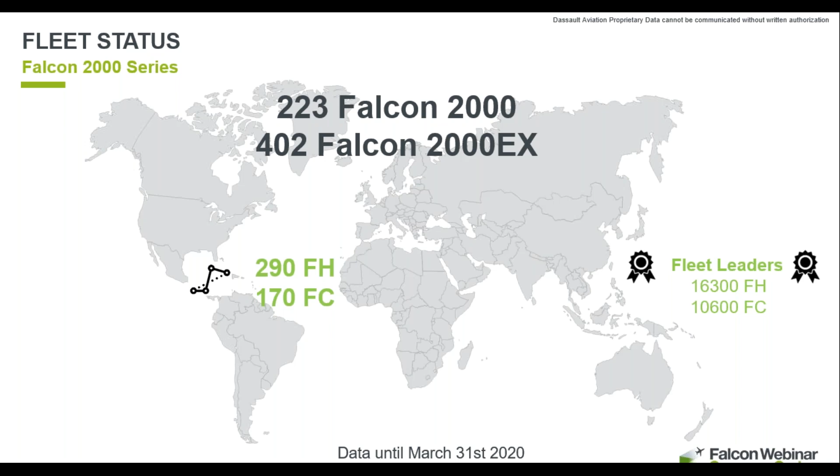So at the end of March, there were 620 Falcon 2000 aircraft in operation in the world, with an average activity for a year around 290 flight hours and 170 flight cycles. 2 aircraft are the fleet leaders. 1 aircraft has already reached around 16,000 flight hours, and another aircraft has already reached around 10,000 flight cycles.

Concerning the dispatch rate, it's the same dispatch rate for the Falcon 2000 series aircraft and for the Falcon 2000 EX series. It is 99.8%.

I just want to remind you that it is very important for us to get your feedback and the reported events concerning your aircraft, because all our analysis for the dispatch rate is based on the data you give to us. So we want to have the most accurate calculation possible in order to present the figures. So do remember, give your feedback.

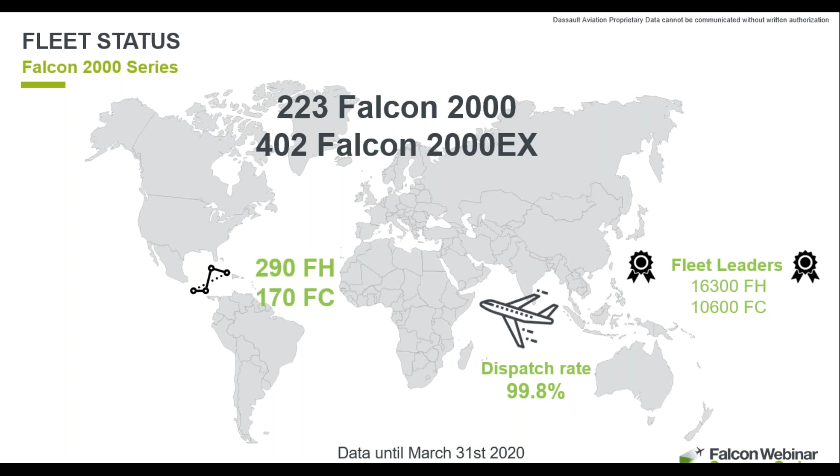During the last seminar, last year, we presented several topics. Now, what is the status on these topics? What are the achievements? As you can see in this table, some of them are released. We have published either a service bulletin or an FSA, and the solution is available for you. But 3 of them are still in progress, in fact, mainly due to logistics issues. You will find for these 3 subjects the updated target date for the publication of the solution.

But today you will have a specific presentation on the aileron bearings in a few minutes, on the new maintenance task for the maximum cabin altitude limitation function, and on all the LED solutions which are available for your aircraft.

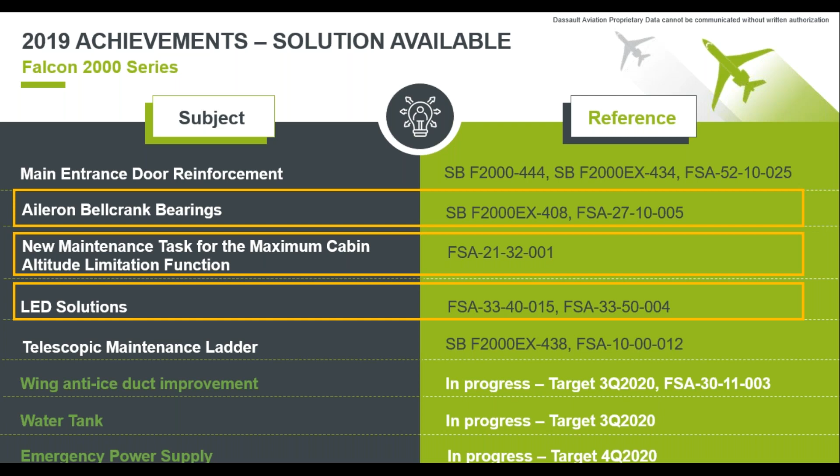So now let's move to the main dispatch drivers. And welcome, Luca.

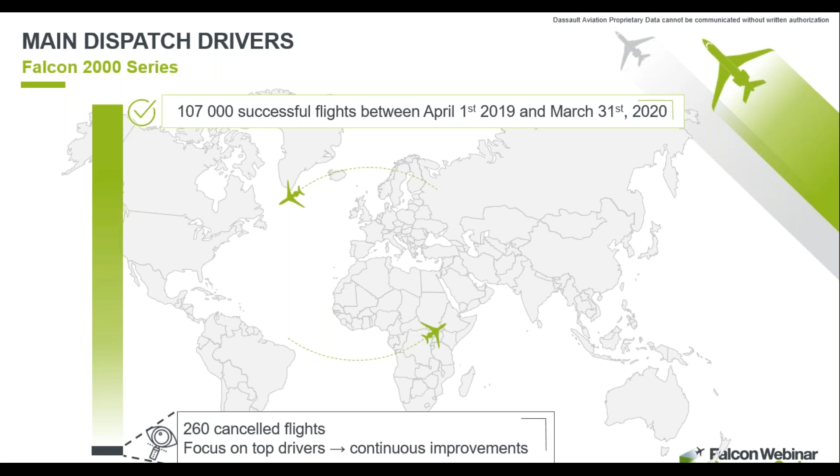So the drivers we will present you are for the Falcon 2000 EX aircraft. Those are the top 5 drivers ranked by the number of cancelled missions. The first one is the NIM module. Then is the engine vibration monitoring unit, nacelle anti-ice valve, accessory gearbox magnetic seals, and advanced graphic module.

The subjects highlighted in green are the ones for which we have a solution, but we will have a dedicated slide for each of them.

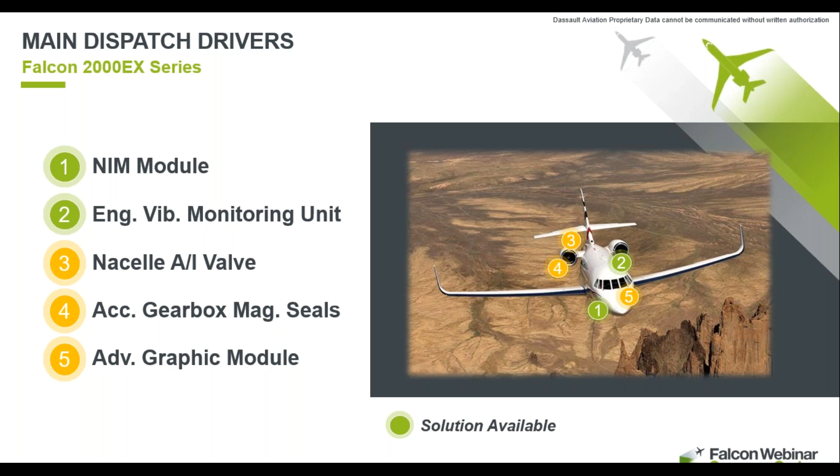The first topic is the NIM module. NIM module is an EASy component located in the MRC. We do have some cancelled missions due to radio cabinet failure.

In recent years, we performed a lot of work with the manufacturer to work on the solder profile and to introduce an improved solder profile on the NIM module. This solution is implemented on every new NIM since November 2013 and every repaired NIM since mid-2015. So the solution is available in spares. We do have a solution.

But we keep monitoring the fleet. Last year, 85% of the cancellations involved not-retrofitted parts. So for us, it's a good metric for the solution.

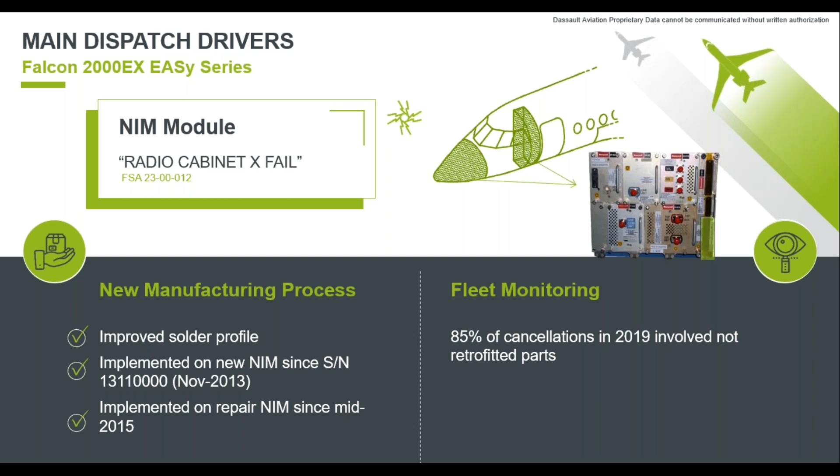If you have this kind of issue, we do have a new part number, which includes improved internal electrical components. It's fully interchangeable with the previous part number, and it's available in spares. Like we did for the NIM, we keep monitoring the fleet despite having a solution, and last year, again, 85% of the cancellations involved the old part number.

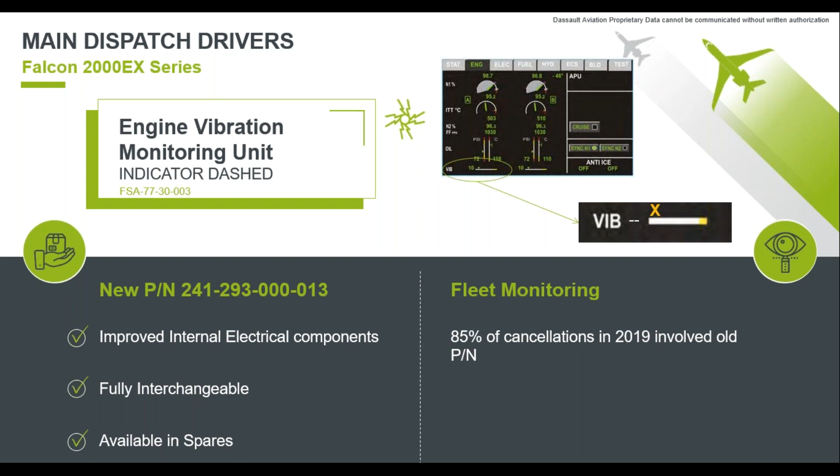Now, at the third position, Matthew will take the mic. Thank you, Lucas. So now I'm going to present you the nacelle anti-ice valve topic as the main dispatch driver.

Basically, there are two flight deck effects. One is the engine anti-ice overpressure, and the other one is the engine anti-ice unwanted operation.

This year we had initial investigations performed by the new manufacturer of the valve, and now we need to conduct additional investigation to make sure the proper actions will be taken regarding this topic. Also, we are working on increasing the quality process for the production and repair of the units.

Regarding fault isolation and extended dispatch, I'd like to recommend you refer to fault isolation manual procedures in case you've got an overpressure or an unwanted operation, because it is very detailed and will help you isolate the faults. We've seen some cases where, for example, the overpressure switch is involved in case of an overpressure. So it's very helpful for you to use these FIM procedures to make sure the correct component is properly troubleshot.

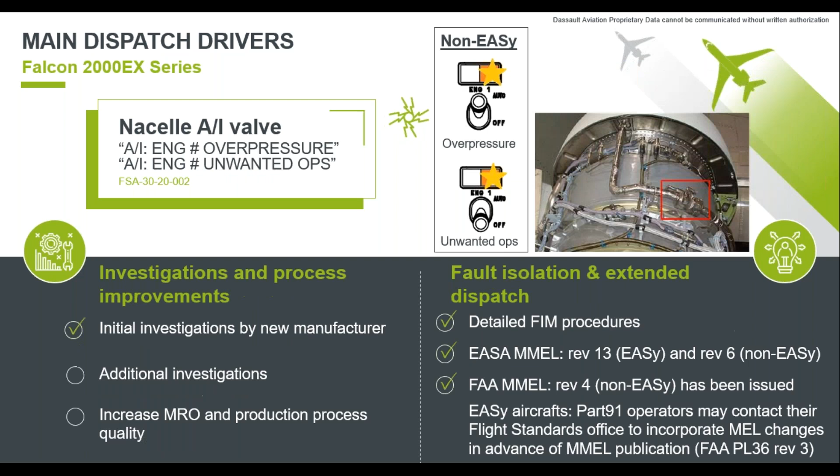The next topic is the accessory gearbox magnetic seals, which is also a main dispatch driver. These seals are located on 3 pads. We've got one on the starter pad, another one on the electrical generator pad, and the last one on the forward hydraulic pump.

What we observe in the field is a premature wear of the carbon element. This carbon element is located between 2 metallic parts, and once this carbon element is worn, you've got metal-to-metal contact, and thus it will generate chips. That's why the main flight deck effect we will see is an oil chip indication.

Pratt & Whitney Canada conducted an investigation in 2019, but unfortunately the root cause for this premature degradation was not identified. Pratt & Whitney is now working on gearbox improvements to improve the reliability of the seal.

We've got some tips and recommendations for you in case such an event occurs. First, send chips to a lab for analysis as soon as possible. There is an alloy typical for an AGB magnetic seal degradation, which is a clue for further troubleshooting. We'd also recommend you contact Pratt & Whitney Canada in case you've got repeated events, to make sure this is addressed.

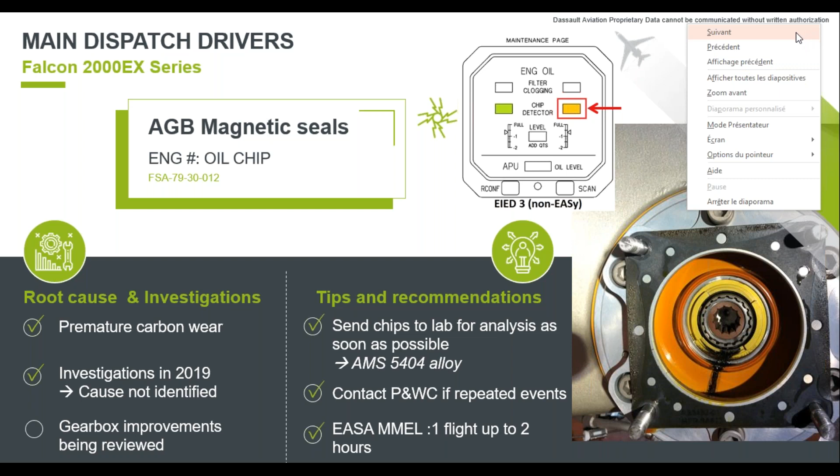So now moving on to the next topic, the advanced graphic module, with Lucas. Thank you, Matthew. Yeah, the last driver, number 5, is an EASy component, the advanced graphic module. Those modules are here to feed your display unit. We do have some AGM failures, and when you face this kind of issue, you will have a red cross on the display unit.

To address this issue, we know that the failure is coming from an internal graphical processor that is facing some ionic contamination. So we keep performing investigation and testing with the part manufacturer in order to provide you the best solution.

Just a special word for the last available version of the advanced graphic module, which is the MOD E. This MOD addresses the data loading issue, the FTP-COM failure that you can have with the EASy II third certification. If you comply with the EASy II 4th certification, you will address this failure. We'll come back on that later on, and we have a dedicated FSA on this specific topic if you want to consult it.

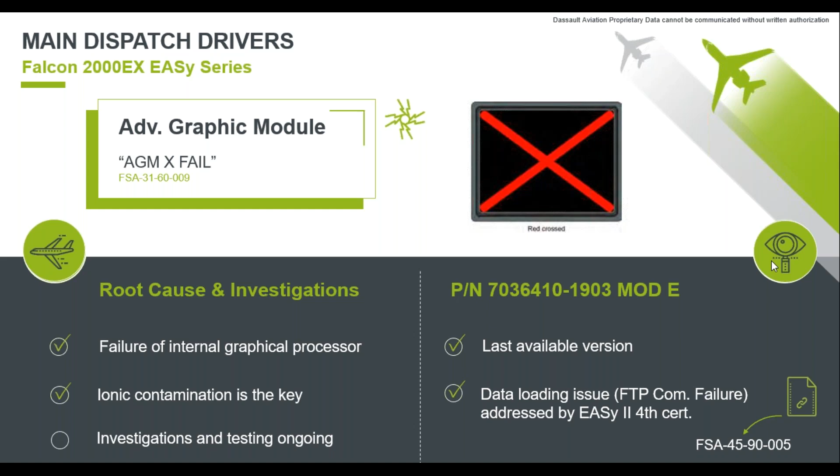Now we'll move to the next section, which is the reliability improvement. And to present this section, François will join me. François, would you like to introduce yourself? Yes, good morning everybody. My name is François Satre, and just like Lucas and Matthew, I'm part of the Falcon 2000 program support team. I have been working for Dassault for 5 years now.

Thank you, François. So, the first improvement we want to introduce today is the bell crank bearings involved in the aileron control. Those bell crank bearings are located at frame 15. They are used to transfer the roll control from the fuselage to the wing.

They are located in a humid area, and we notice some corrosion issue on the bearings. The corrosion issue can lead to stiffness in the aileron control, which is something we want to avoid. That's why we worked on a new design, consisting of a new material more robust to corrosion. The solution is available through a service bulletin, which consists in replacing the 4 bearings.

If you comply with the service bulletin, it will also have a direct impact on maintenance cost, because you will extend the bearing replacement from the 1C inspection up to the 2C inspection. During the 1C inspection, you will just have to perform a visual inspection. If you want more technical details, there is a dedicated FSA. I forgot to mention that this topic is specific to the Falcon 2000EX series.

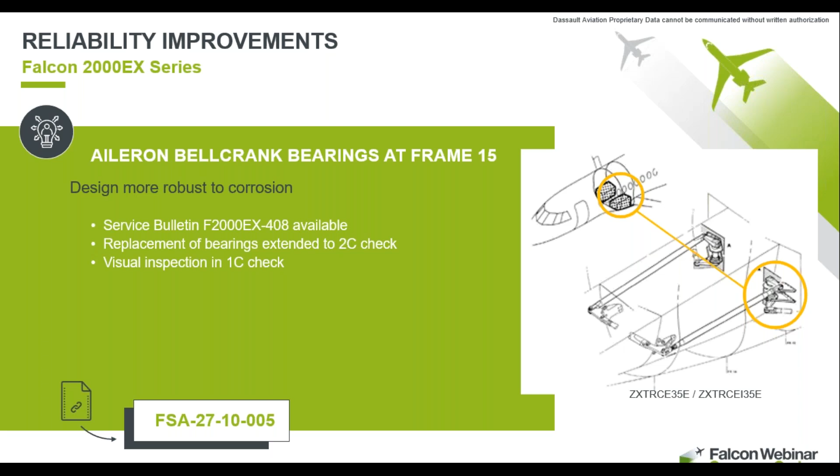The next improvement, specific to the Falcon 2000EX EASy series, is directly linked to what you can see on the right of your screen. In more and more airports, the APU runtime is limited due to the environmental footprint. With our aircraft, when you initialize the aircraft with the GPU to reduce the APU runtime, you can have some issue while switching to the APU.

You can lose the flight plan data. You can also lose galley and cabin system, which can be annoying for the crew and passengers. That's why we worked on a solution to avoid issues while switching from GPU to APU. This solution is available through a service bulletin. You have to know that if you want to comply with the service bulletin, there is a prerequisite: two service bulletins, one consisting in batteries charging by GPU, and the second, the suppression of voltage drop during APU start. So you must comply with those before complying with the final solution.

Again, if you want full technical details, I encourage you to consult the FSA. So for the next topic, I will leave the mic to François.

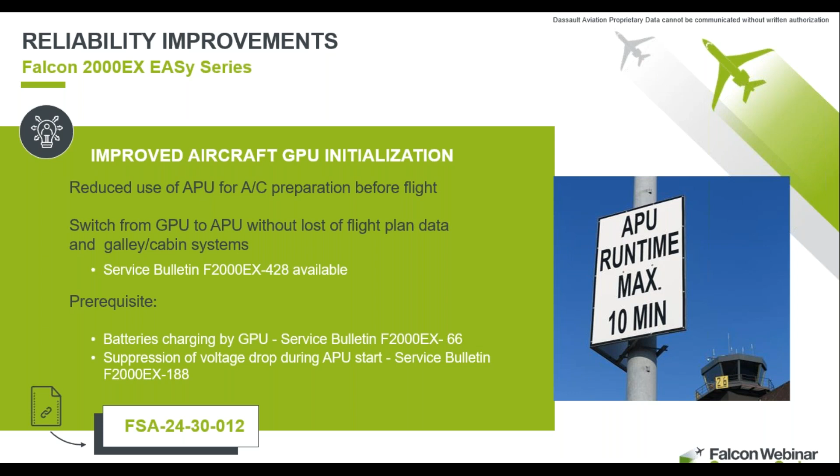The next topic concerns all the Falcon 2000EX series aircraft which are equipped with aft chemical toilets. These toilets are fitted with a rigid filler line, which is the part you can see highlighted in yellow on the upper right picture. This line can be used for two purposes.

The first one is to fill the waste tank with clean water prior to a flight. The second reason is to use it during the rinsing process of the waste tank to rinse the tank with clean water as well.

We have had several cases of corrosion and cracks on this line reported by 2000 operators. That's the reason why we are currently working on an improvement which consists of a flexible pipe more robust to corrosion. These improvements will be made available by the end of the year through a service bulletin.

In the meantime, we have two recommendations to prevent occurrence of corrosion on this part. The first one is to make sure that the line is fully drained prior to closing the flushing coupling. Otherwise, you may have some water retained in the line, and this could lead to corrosion.

The second recommendation is to never put disinfectant solution in the waste tank through this filler line, because this disinfectant solution is a corrosive product. It should always be introduced in the waste tank through the toilet bowl in the cabin.

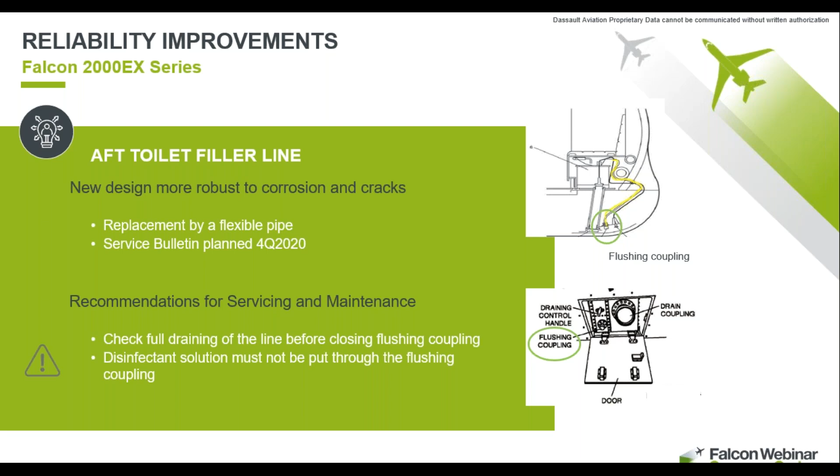The next reliability improvement I would like to introduce are the LED solutions, which is a topic we've been working on for the past few years. There is an FSA on the portal which describes all the available solutions at the moment, starting with the exterior lights.

So from nose to tail, we have the taxi lights, the landing lights, the belly anti-collision lights, the emergency door projector on the right wing. We have on the fin tip and/or on the winglets the anti-collision and navigation wing lights, the upper fuselage anti-collision, and at the back we have the anti-collision and navigation lights.

The upgrade path for all those parts is detailed in the FSA, and it's made either through compliance with a service bulletin or through installation of interchangeable parts.

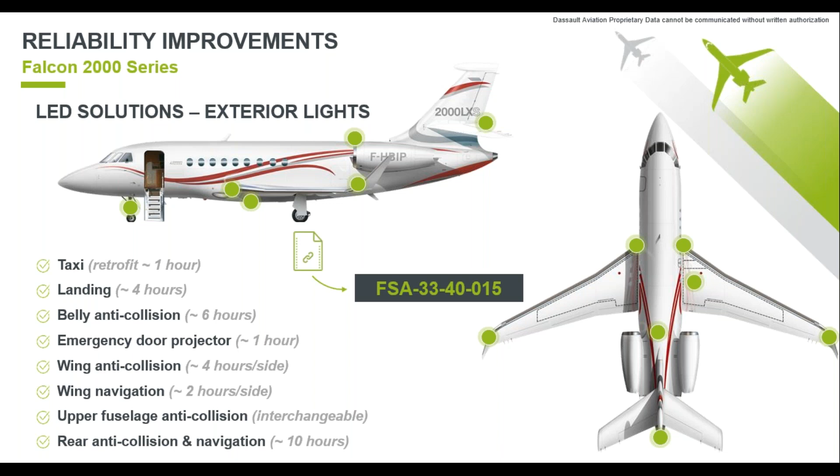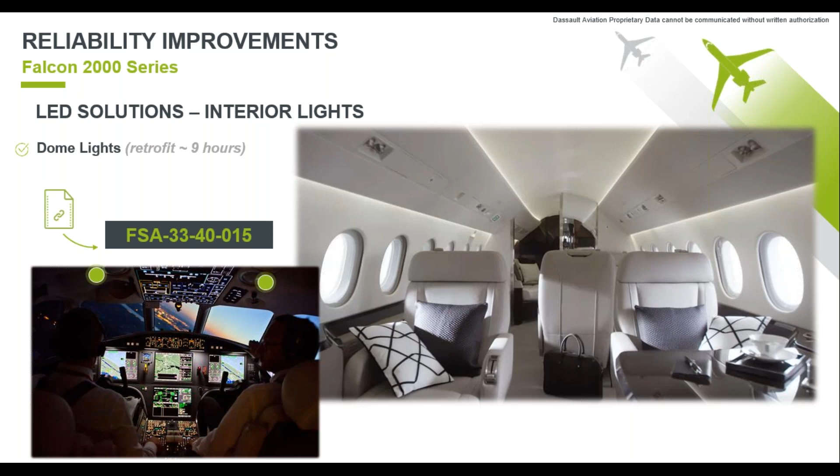This FSA also details the available solutions for interior lights. Now, at the moment, we have a first service bulletin that enables installing LED dome lights in the cockpit, and we also have a service bulletin for cabin emergency signs in the cabin.

As you can see on the bottom right picture, these LED signs come with a new design of green pictograms instead of the old-fashioned red writing on the white background. So this is a small change that comes with this LED improvement.

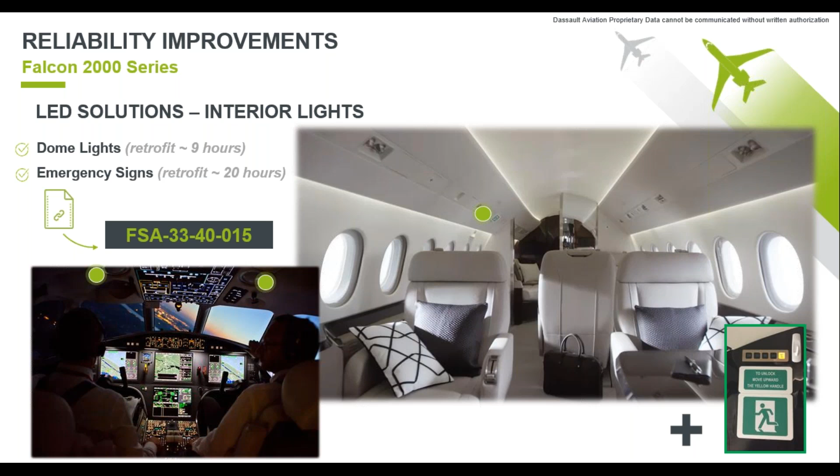Moving on to the maintenance improvements now, the first topic I want to introduce concerns the pitot probes. Some of you may know that these probes already have inspection and cleaning tasks that provide damage criteria, in particular for the blade damage and for the tube-shaped deformation.

We want to improve those damage criteria and add a new criterion for the longitudinal bending of the probe. So by the end of the year, we will publish an updated task that will permit a total longitudinal bending of up to 1 millimeter, which should help further prevent scrapping of these parts.

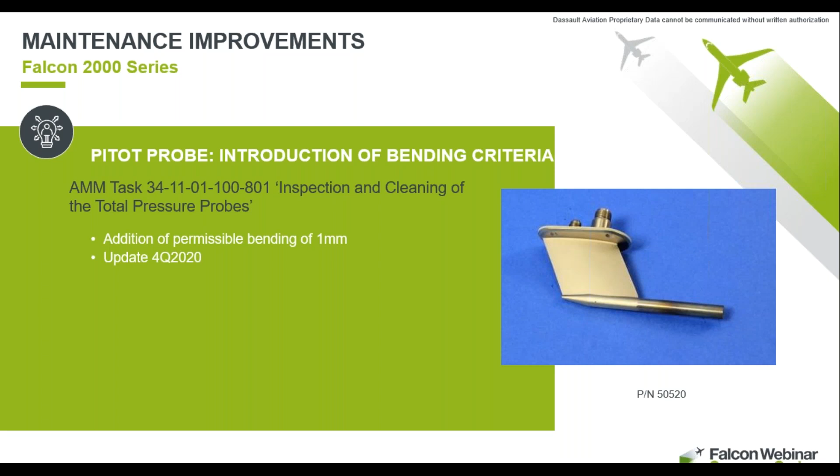We are also working on the ground servicing manual procedures, and in particular we have issued lately for the 2000 series a new procedure for foreign object suspected collision inspection. This procedure aims at providing more autonomy to the flight crew in case of a suspected collision, typically a bird strike.

Instead of having to go through the whole comprehensive maintenance inspection, the flight crew will be able to use this light procedure to perform a visual inspection without any specific equipment. If there is nothing abnormal reported, the aircraft can immediately return to service. Otherwise, the usual comprehensive maintenance task for inspection will apply.

This task is already available for the 2000 series, and for the 900 and 7X, the ground servicing manual will be updated by the end of the year.

Thank you very much, François. Now let's move to the last topic concerning maintenance improvements.

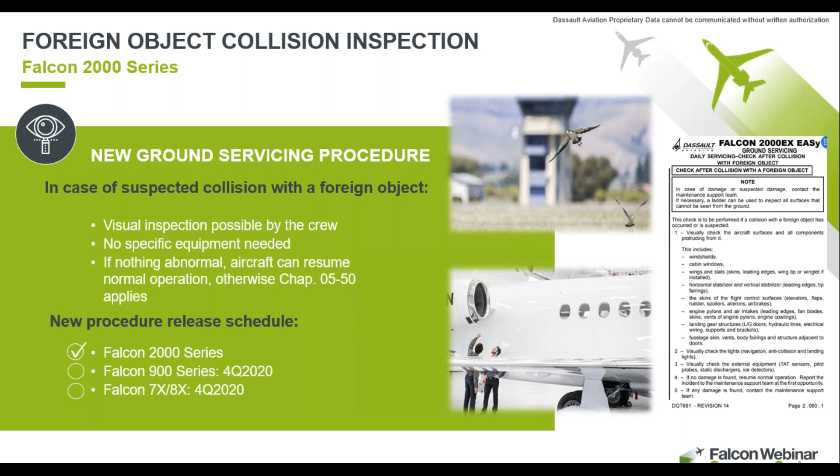So, François, can you explain why you introduced a new task and a new tool in C-check for the outflow valves? Yes, indeed. We've introduced this new task scheduled in C-check for all the Falcon 50s, 900 and 2000.

It's a task that aims at performing a test of the cabin altitude limitation function. In the past, this test was performed only during the check flight performed at the end of the C inspection. But unfortunately, it did not enable anticipating failures, and sometimes it would end up causing additional downtime to repair the outflow valves at the end of the C check.

So now, with this test performed on the ground during the inspection, you can actually anticipate failures and send the outflow valves for repair during the C check.

This test enables you to check both valves independently, so you can identify the faulty valve if any of them is faulty. In the end, you will send only one valve to the repair shop.

To perform these tests, we have developed a dedicated tool, shown in the upper picture. This tool is composed of a vacuum pump and a set of fittings, pipes, manometers, and flow meters. All the details are provided in the FSA 2132001.

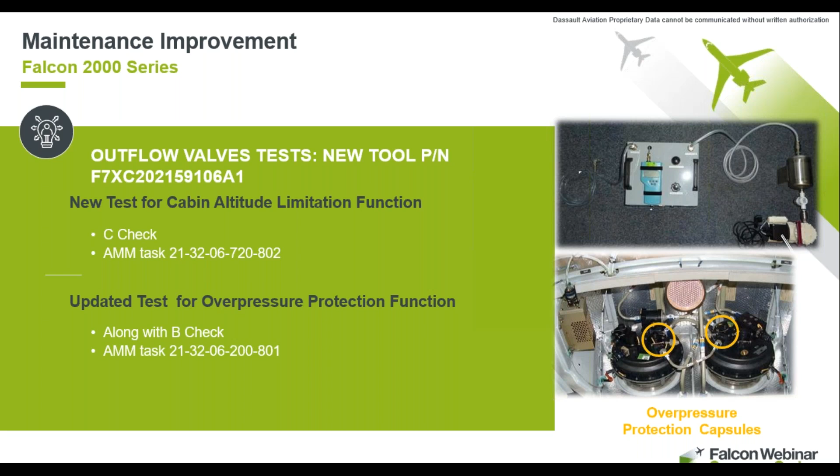Yes, thank you. But can I use another tool to complete these tests? Well, we've had this question quite a few times, actually. The answer, unfortunately, is no.

All the AMM values, the threshold values that appear in the AMM, have been established through an extensive test plan performed on production aircraft with this specific tool. If you use another tool, a different vacuum pump with pipes of different sections, you will modify the pneumatic simulating environment of the outflow valves, and this will invalidate the results.

However, we have a few tips regarding these two tasks. First, you don't need to remove the valves to do the test; they can remain on wing. You don't need to energize the aircraft either. And finally, the tool is available for sale. The list price is $13,000, and it's also available for daily rental at about $250.

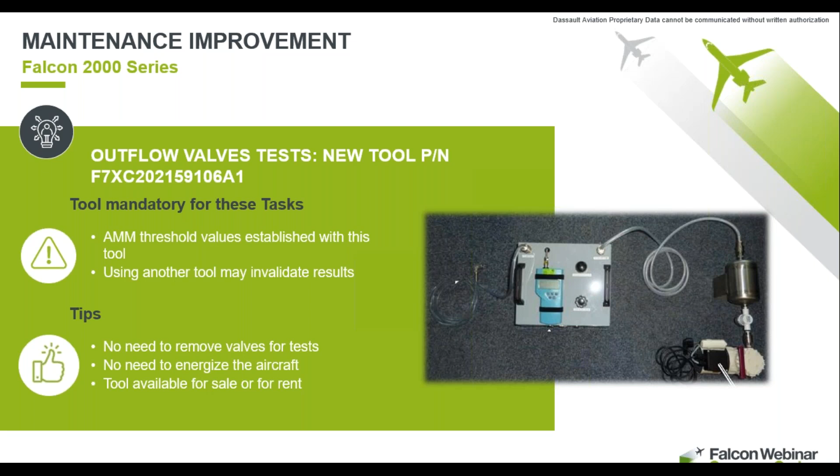This concludes the presentation on maintenance improvements. I thank you for your attention.

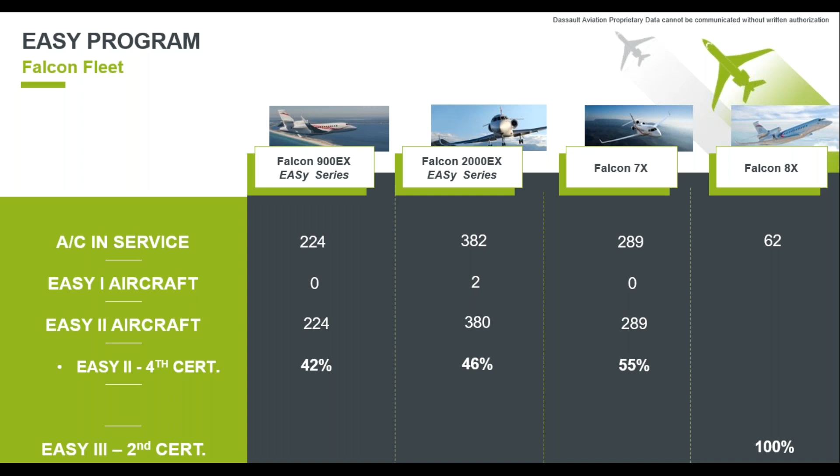As a reminder, the Easy 2 4th certification content is on the baseline. The fix for the latency timer correction, it is the FANS 1A CPDLC. Also, it allows recovery of the full navigation database, giving more allocated memory to cope with the database size increase. And also, it corrects the data loading issue encountered with AGM Mod E and Easy 2 third certification.

This baseline is free of charge. Two options are available with Easy 2 4th certification. The first one is the FANS 1A push to load function, and the second one is the fast chart data loading for dual Jeppesen chart, also called DDL, Delta Data Loading.

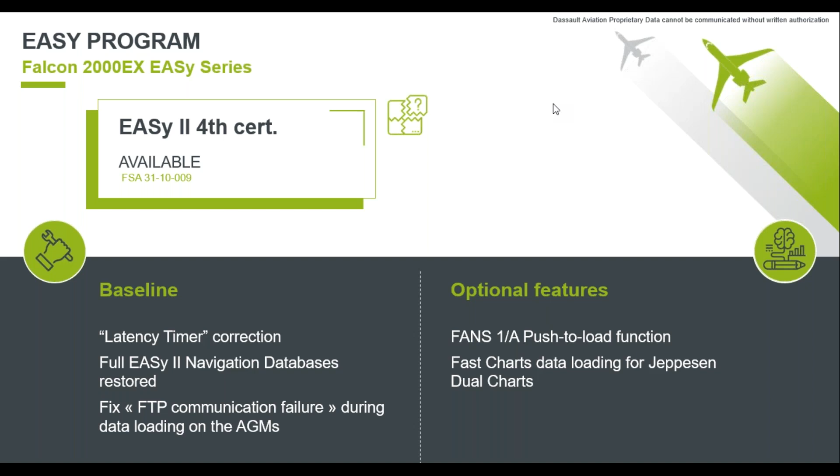Different service bulletins are available according to whether the aircraft is legacy IO or new generation IO, and commercial programs are available when combining these service bulletins. Also, packages are available when ordering dual charts combined with fast charts data loading. You will be able to find more information on the Falcon portal, looking at the service bulletin commercial summaries.

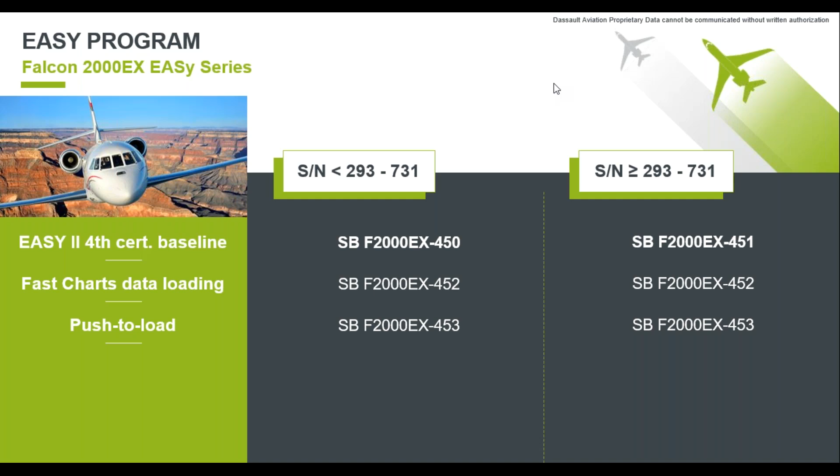Good morning, ladies and gentlemen.

Following the recent maintenance, repair, and overhaul acquisitions by Dassault Aviation, and the associated presentation during last week's webinar, I am proud to present this aftermarket solution update for Falcon 2000.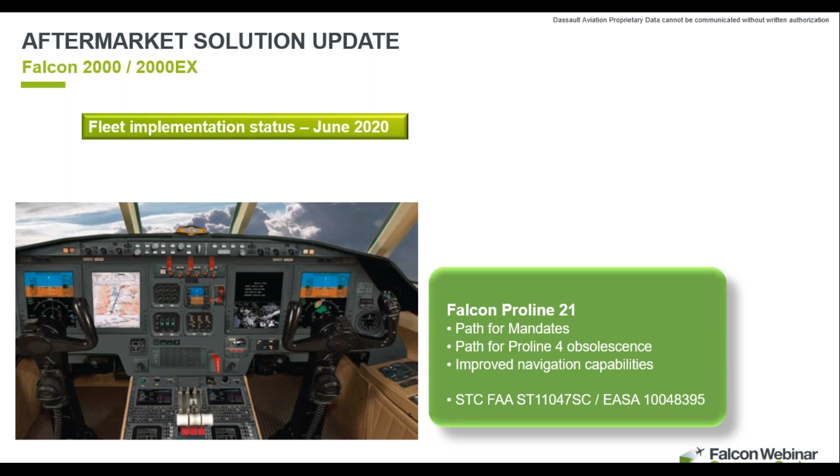Let's start with our major program, ProLine 21. Keep in mind that ProLine 21 is a path for mandates, especially the recent 2020 mandates, and also a path for ProLine 4 obsolescence. With such main key drivers, installations of ProLine 21 keep on increasing.

So one of you may wonder if it's worth upgrading your Falcon 2000 or 2000EX with ProLine 21. To reply with the help of the well-known Aircraft Blue Book, we can formally say yes, it is worth upgrading your aircraft with ProLine 21, either with the baseline, which consists of LCD displays and the FMS, or with options such as the Fans 1A function.

What's more, Dassault and the aftermarket team keep on providing improvements for your Falcon 2000. One common improvement is the 3D scan radar. This radar combines multiple radar scans to detect short, mid, and long-range weather, resulting in superior weather detection at all ranges and phases of flight. It also includes a forward-looking predictive wind shear and a vertical weather profile function.

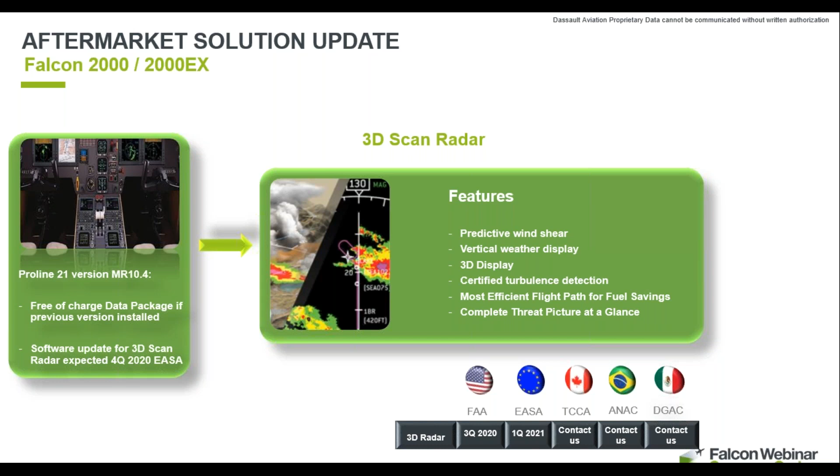This improvement will be FAA certified by the end of the year and EASA certified in the first quarter of next year.

Another common improvement is the enhanced ground proximity warning system. Following a previous FAA Safety Airworthiness Information Bulletin dealing with a fatal accident on a UPS flight, one recommendation is to upgrade your EGPWS system to the latest software version, named 238.

With this system, we also bring you the Smart Runway, Smart Landing option, which will prevent taxi runway incursions. This solution is already FAA certified and will soon be EASA certified.

Besides, we already have certified solutions. These solutions for your Falcon 2000s, EASy and non-EASy, are listed in our aftermarket catalog, which can be reached from the Falcon portal.

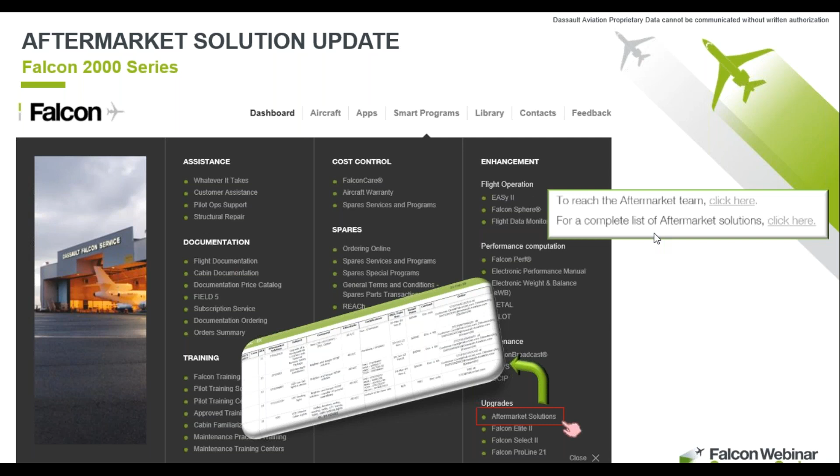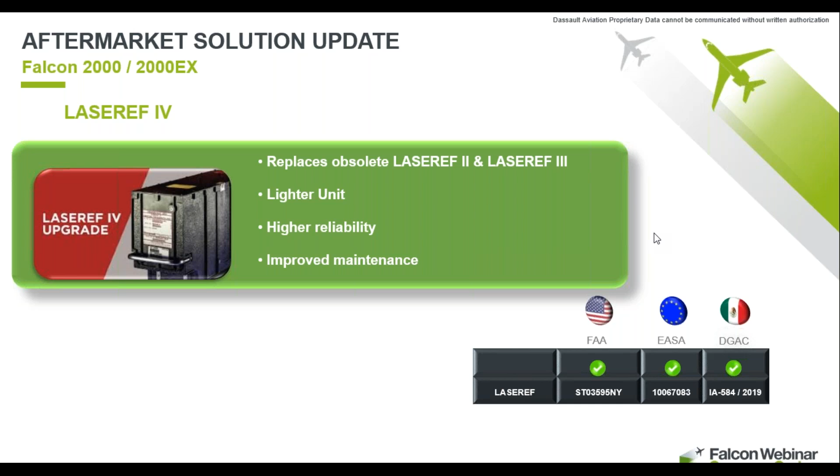Among the recent certified solutions, we have the LaserRef 4 for your avionics, which replaces the previous LaserRef 2 and LaserRef 3, which hit end of support last December 2019.

For your cockpit, we also have the already certified True North SATCOM for the fans function, which is FAA and EASA certified since the last quarter of 2019. Since that date, many Falcon 2000 EASys are flying with this solution.

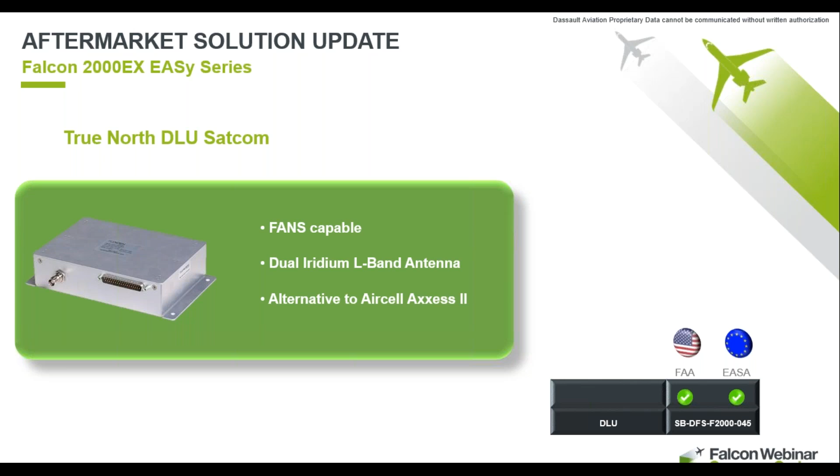For your iPad, you can bring it either into the cockpit or the cabin. Especially for the cockpit, you can bring your iPad through our solution, which consists of a USB charging MFI, which means made for iDevices. This solution behaves as a docking station for iPads, and it is fully integrated into our Falcon 2000 cockpits.

In addition to that, keep in mind that for your iPad, we also bring you our Dassault Falcon Sphere 2 software solution.

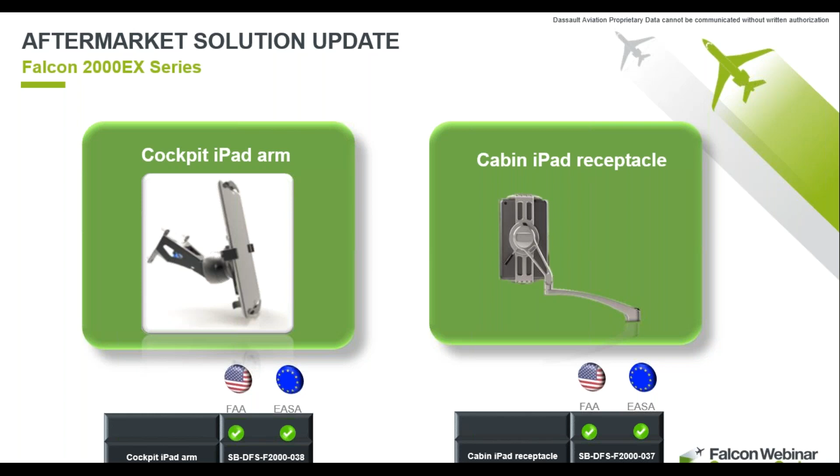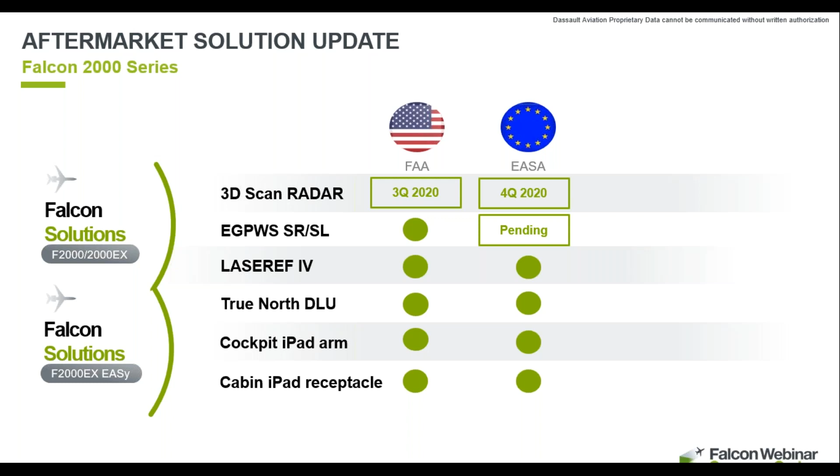This slide presents a summary of the coming solutions at the top and the available certified solutions at the bottom. This is what I wanted to share with you today. If you have questions, don't hesitate to contact us at aftermarket@falconjet.com. Thank you very much.

Thank you very much, Laurent and Frank. Now, Mathieu, can you give an update on improvements concerning engines, APU, and IPPS?

Yes, indeed, Catherine. Let's start with the Falcon 2000 EX series, for which the engine is manufactured by Pratt & Whitney Canada. The first topic I'd like to talk about today is the air turbine starter, part number -6 and -8.

There are three symptoms we can see in the field. The first is oil chip found in the collector during oil change, oil leak at the shaft end, and also, but rarely, a broken or seized shaft. This led in the past to delays and cancellations, but it's no longer a dispatch driver today.

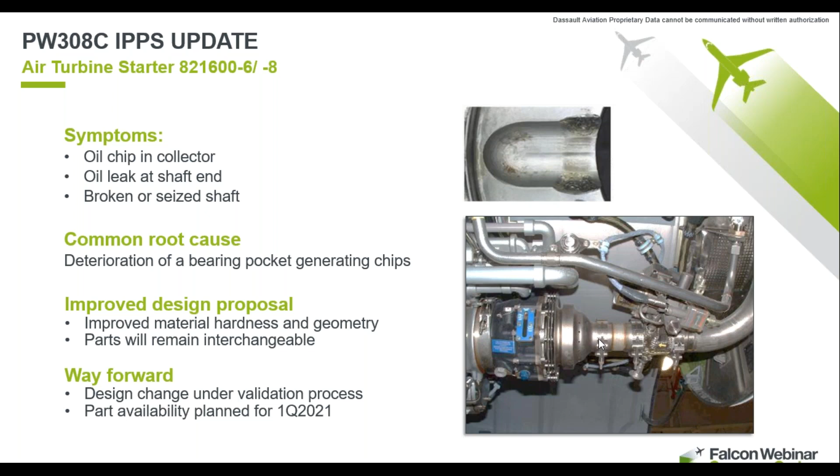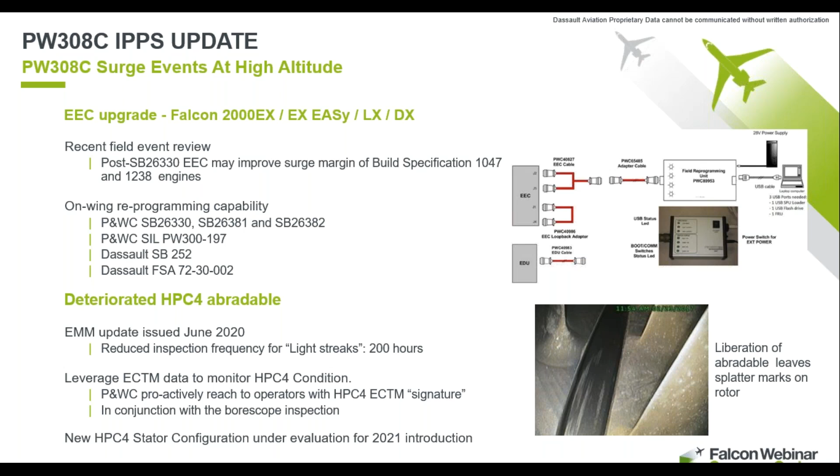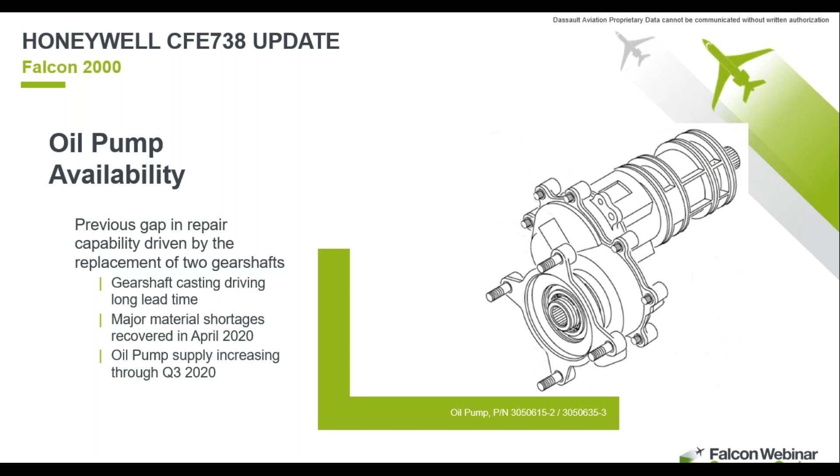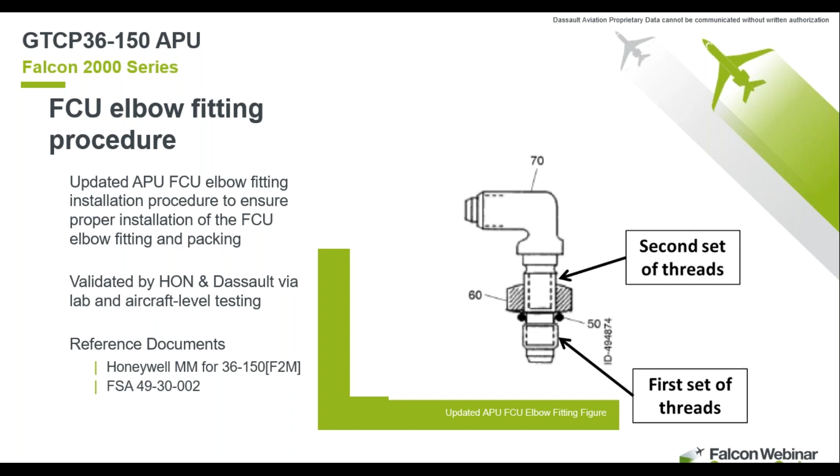We received some questions. The first one concerns the outflow valve check tool. François, can you give us the price for the tool?

Yes, the tool is currently available for sale at $13,240, and the daily rental price is about $250. I remind everyone that this tool is to be used for all the C checks on the 50s, 900 and 2000, and for the B check of the same models.

Okay, thank you, François. Other questions concerning the foreign object collision. Luca, can you give us more information about the availability of the inspection procedure in the documentation?

Yes, of course. This procedure is already available for every Falcon 2000 series ground servicing manual. You can find it under section 2, which is the daily servicing section. This new task was introduced in the last revision for each model. For example, for the 2000EX Easy, it has been introduced in revision 14.